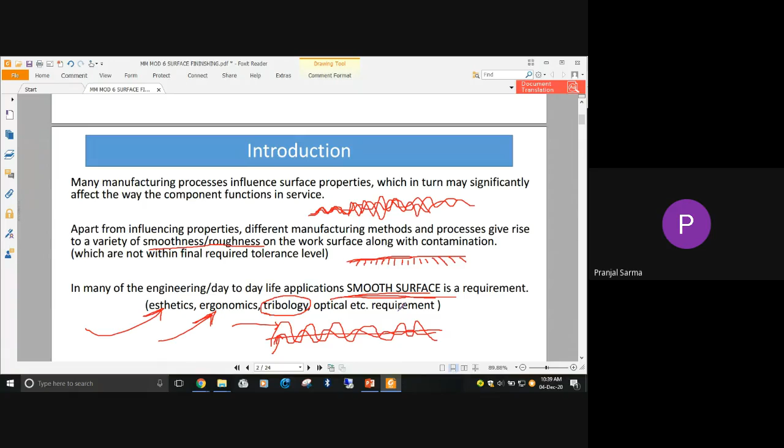Similarly, from an optical requirement perspective, smooth surface is also a requirement. Lenses used in cameras have very highly smooth surfaces - their level of surface finish is in terms of nanometers, a nanometric level of finish.

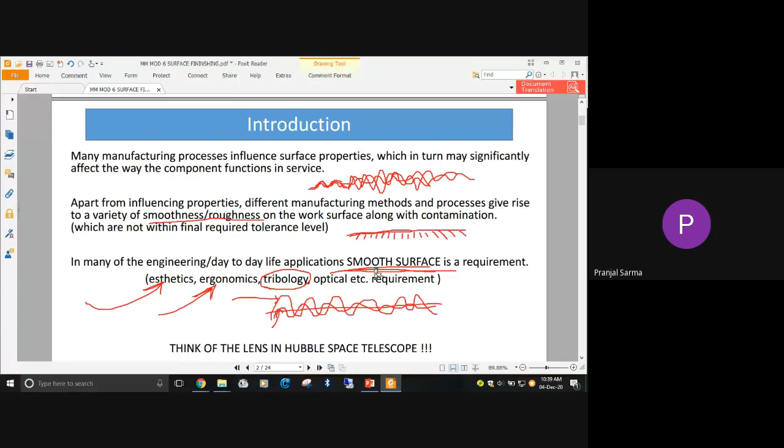Think of the Hubble Space Telescope, which I believe all of you have heard about. It is in space, continuously taking photographs of stars, nebulas, and galaxies. Think about the level of surface finish required in the lenses used there.

Also, all of you have a smartphone, right? Nowadays smartphones have very high level, very good cameras, and in those cameras we have different lenses. The surface finish of those lenses used in mobile cameras or other cameras requires a very highly smooth surface.

That means the surface finish has to be very good, which in turn means the surface roughness value you need to achieve on that surface is very low. Lesser the surface roughness value, higher the smoothness or finish of that surface - they are interrelated.

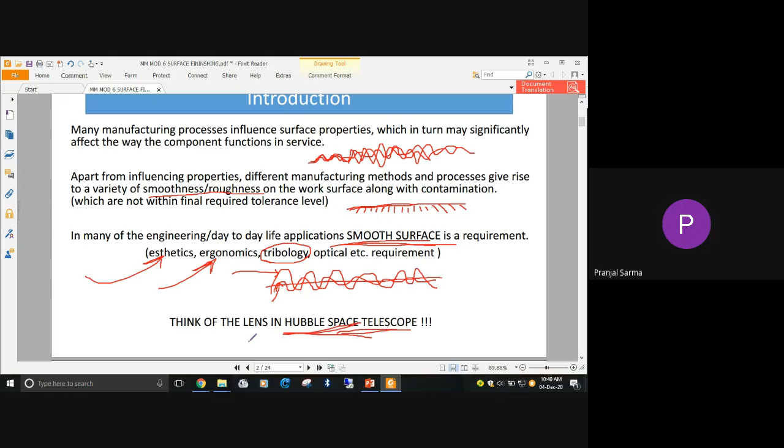So after this, if a certain surface roughness or smoothness needs to be achieved for a certain application, you need a variety of knowledge of different surface finishing operations, depending on what kind of material and what level of finish you require. You will be discussing those surface finishing operations in this particular module.

There are different types of surface finishing operations - some may be suitable for small components, some for bigger components. Some might give you a level of surface finish in the nanometric range, some in the normal micron range. Depending on your requirement for that application, you select a particular suitable process for surface finishing your product.

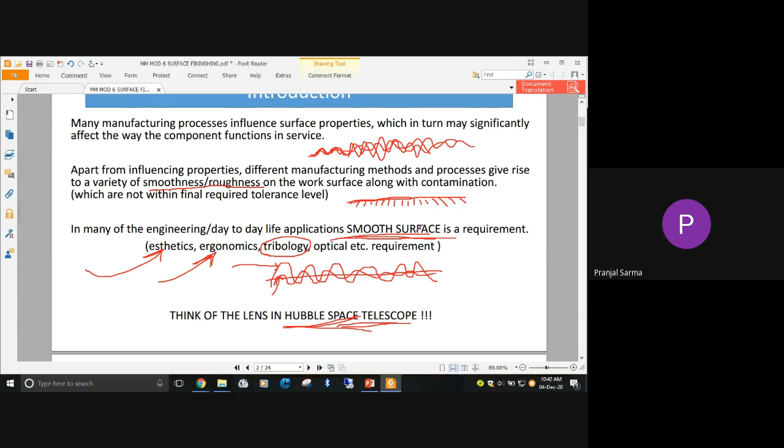Understood up to this point why surface finishing is required and what the various requirements are? Let me know - yes or no.

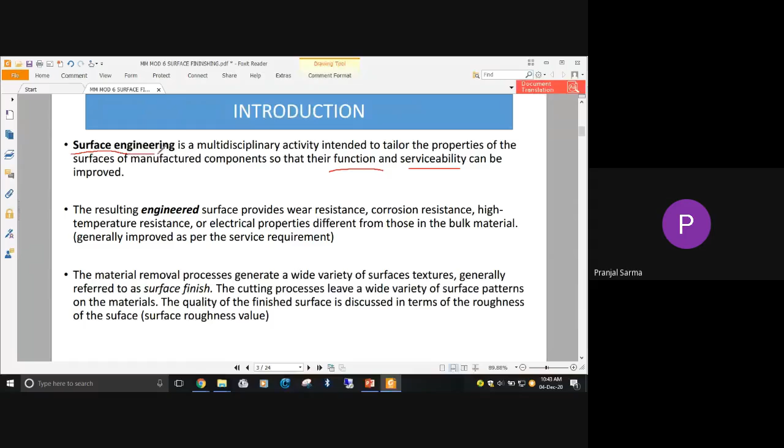Surface engineering is a broader perspective. It's not only about getting the smoothness of a particular surface, rather it also encompasses all the activities which can give rise to some other functional requirement. Sometimes your intention may be that the surface should be harder than the rest of the bulk material of that particular product.

Similarly, sometimes you might require a hydrophobic or hydrophilic surface depending on your requirement. That also falls under surface engineering because you are tailoring the property of that particular surface.

Sometimes you might have heard about self-healing of surfaces. Nowadays people are talking about self-healing materials - from a materials point of view, that kind of research has come up, and there are certain self-healing alloys and self-healing materials. So even worn-out surfaces can be given these self-healing properties. These will also fall under surface engineering because somehow or other you are tailoring the functional or service requirement, the serviceability, of that particular component.

With surface engineering, we only talk about the improvement of these kinds of properties - functional property or serviceability. We cannot say that if a particular process carried out on that surface has deteriorated or degraded its quality, that falls under surface engineering. Surface engineering's intention is that you have to improve the functional or serviceability of that particular component.

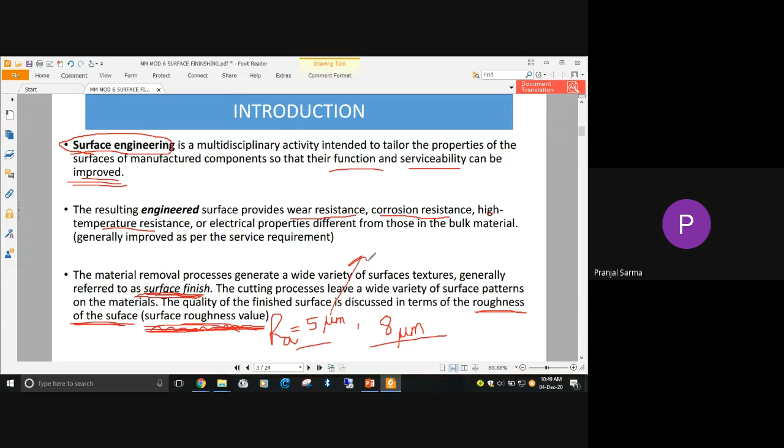Generally for surface roughness, we consider the RA, the roughness average. Suppose for one surface the RA value is 5 micron, and for another surface it is 8 micron. Which one do you think is having a better finish? Surface A has RA value 5 micron, Surface B has RA value 8 micron. Which one is a better surface in terms of quality, surface roughness?

Who will tell me? Bhaskar, you tell me. Sampailar, you tell me. Tritiraj, you tell me. Yeah, give me the answer. Bebeto, give me the answer. Bebeto is not even here. Dizaras, Karan - see, it shows that most of you have just logged in, and some of you are not even here. Avinash?

Yes sir, Surface A, sir. Surface A is better or worse? So roughness is better, sir. Okay, that's the correct answer.

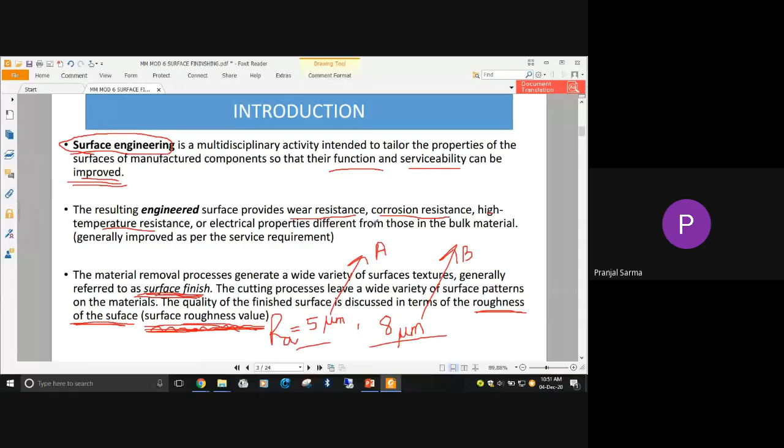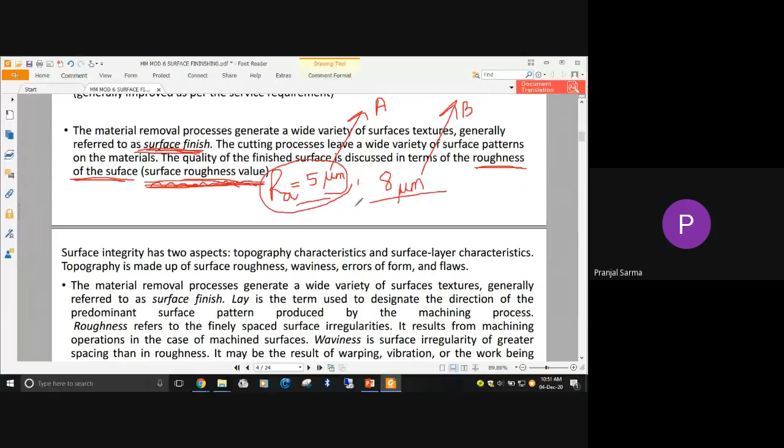Bebeto has given B as the answer. No, Bebeto - as you have said, the RA value for surface A is less, that means it is having a better finish. Roughness less means what? Smoothness is good, or the surface finish is better.

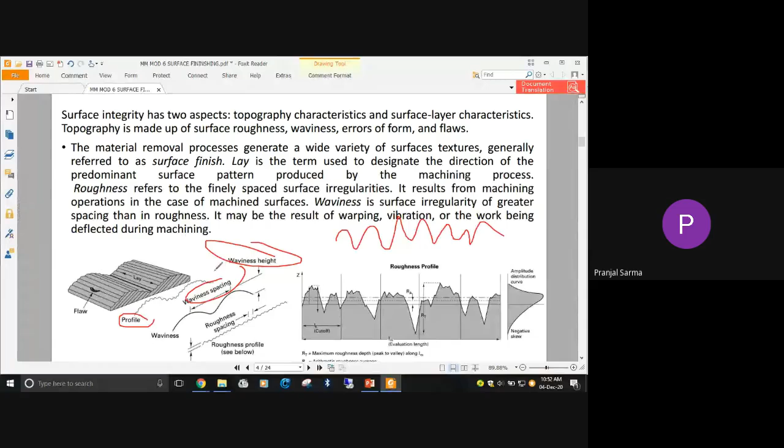With this done, we'll stop here for today. Other terms, the different terminologies involved with respect to surfaces that we have previously shown you - this way we can have the pattern of the surface and all. What are the different parameters like waviness, spacing, what is called surface roughness or surface profile - those things we will discuss in the next class.